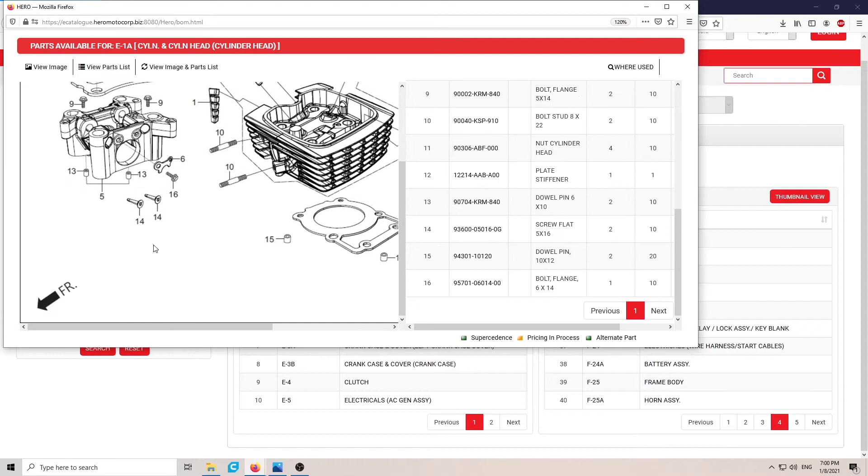In the previous video I showed you a picture, a line drawing, which I picked up from this website. Yeah, there you go, this is what I showed you in the previous video. But today we are going to do something quite exciting to me, not so exciting to you probably.

You have heard me time and time again that I want to convert my BS4 X-Pulse into a BS6 oil-cooled X-Pulse. Because it's necessary - that single cylinder air-cooled engine does not dissipate heat quickly enough if you get stuck in sand or mud, so it's better to do that.

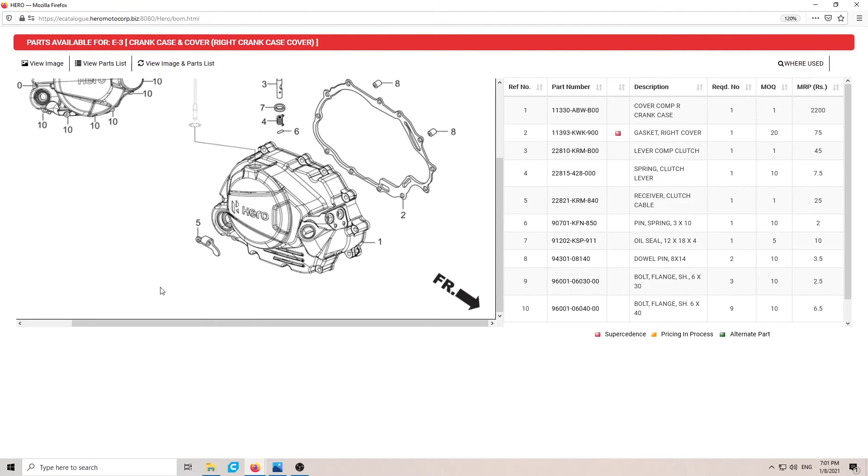So we'll find our part. It's the right crankcase cover, that's what we want changed. Click here, maximize, so we'll see the image first. There you go, now you get the detailed view of just the image, the entire view. You can zoom it up a bit.

This is the old one, you must be familiar if you own a BS4 X-Pulse. And this is the new one - BS6 guys, this is for you, this is your playground. So this is the BS6 right side crankcase cover, and this is the BS4 right side crankcase cover. I told you already, the bolt pattern seems the same, and that's why they didn't even bother differentiating the different bolts that are used here. Everything is the same here.

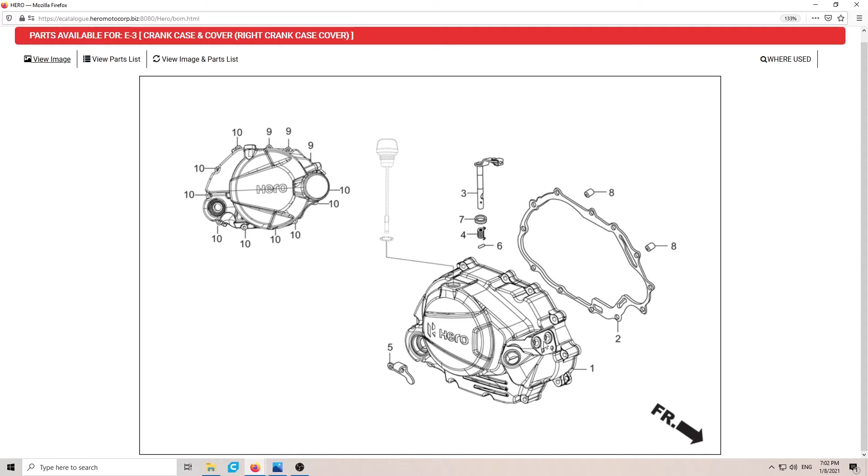And so the BS6 crankcase cover has the important thing that I want: the oil filter - sorry, the oil inlet and outlet for the oil cooler. So now we need the details and the price of the parts. So we'll go to parts view list.

Nah, that's just boring, we'll go here. So we'll select part 1, which is this, and it highlights us. So you get the part number, you get the description of it, and minimum order quantity 1, MRP 2200. So you get the price of the right side crankcase cover.

So if your dealer thinks he's smart and tries to pull off some tricks, you can now fact check him. And another thing that makes me realize another detail that gives it away as a dealer's or commercial website is, you see the minimum order quantity for the gasket cover - you see, 2 gasket cover, 20. You have to order 20 just to get it. So this clearly indicates that this is not for measly consumers but for commercial business owners. So while we are here, we'll check out the price for the crankcase cover, that is 2200.

You need a gasket along the way. You can find it in a local shop. I told you earlier, if you don't find the 200cc X-Pulse gasket, you can use the 160 Hero gasket, it's the same. So we need a gasket, that costs 75, so 2275 total if you want to get these two. That's it, and the rest of the parts should be replaceable.

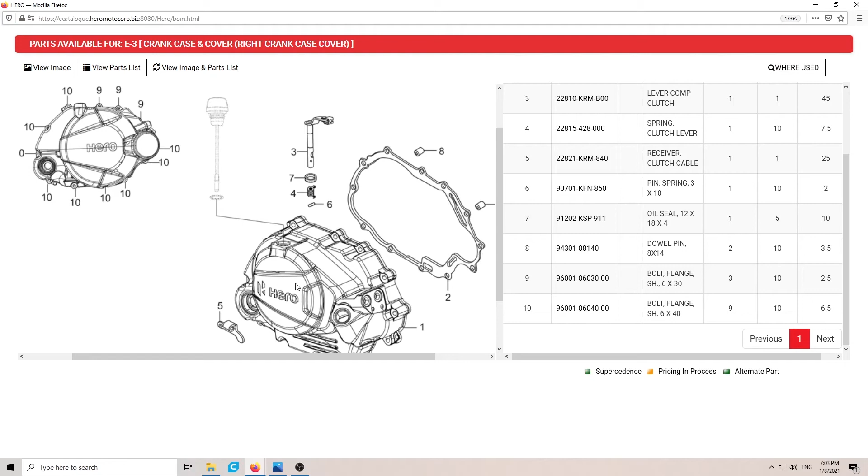That's basically my theory. Now we have the right side crankcase cover. We need the oil cooler. Let's get back to that. Close this, and where is it in our frame? Go to page 1, here it is. In the frame section we have number 3, F-1B oil cooler. So we'll click on that. Yo, the gold. This is the thing that we really want.

Let's view the image. So for the necessary conversion from BS4 to oil cooled BS6, we mean just the oil cooling, we're not converting the catalytic converter and all that. We need the right side crankcase cover for that, and this entire stuff.

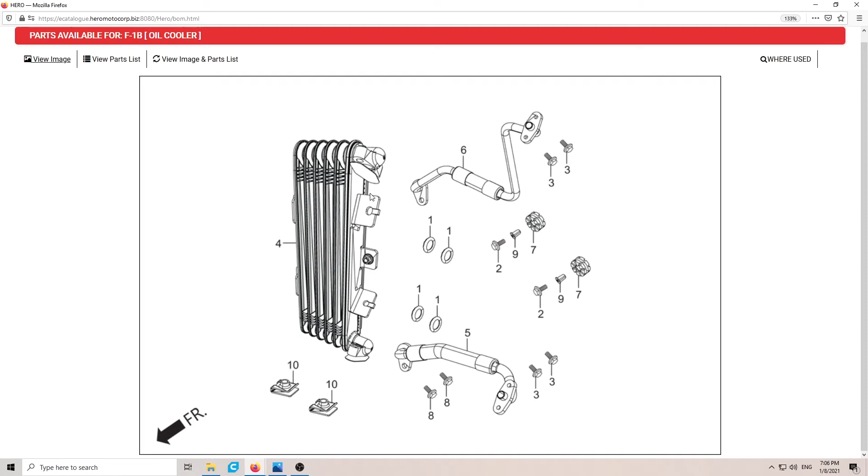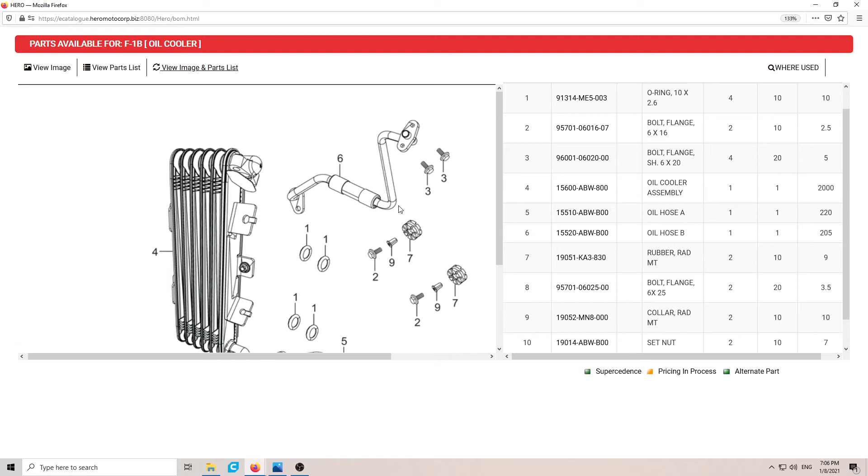I'm pretty happy to find out that you can actually get quite a lot of details here. So let's view the image with the part list, and we have all the details here. How many o-rings you need, how many bolt flange M6 by 16 millimeters, how many bolts you need for the oil cooler assembly, oil hose A, oil hose B. In the image it just shows this shortly, but in actuality I don't think it's just this short - it's made for the convenience of the user, I don't know.

So this is the one. You have rubber pads, another M6 by 25 bolts, collar, rad mount, then you have set nuts. So you have the required quantities that you might need for an entire oil cooler assembly, and then you have the prices of the respective components.

So you multiply that and add the total, and then combine it with the 2275. Then you get the total cost of how much you have to spend just to convert your X-Pulse into an oil cooled one. I think it should be in the ballpark of 5500 something. If you have that much, you can convert your X-Pulse into the oil cooled one.

And I urge all of you - if you're just riding in the city where there's pavement and slight dirt roads, it's not much of an issue for you. But if you are going to take this where it belongs, that is off-road areas, multiple times you will get stuck, like in sand, loose gravel, or probably mud or slush. So I urge everyone who owns a BS4 one, please - 5500 is quite less compared to an entire engine rework if anything bad happens.

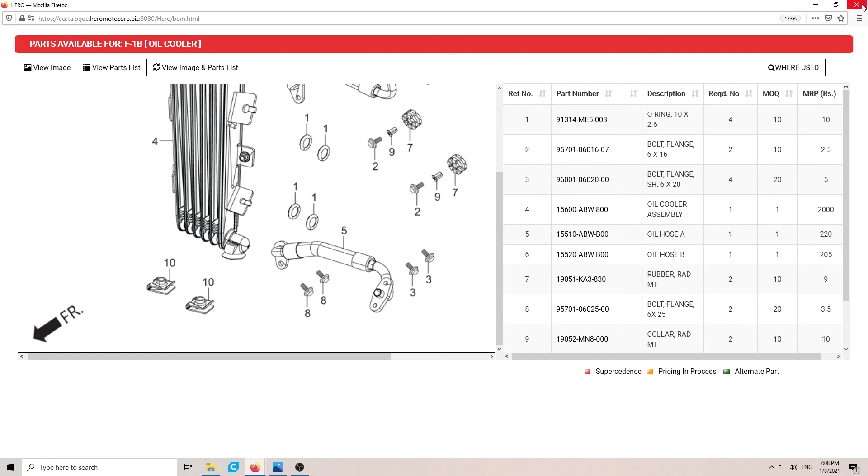So this is a quite useful website for all of us. And downloads - nothing interesting there except the user manual, and we all have the user manual. I hope it contains a workshop manual, which would be quite a gem to find on this website, but I'm working on that. Let's hope we find a workshop manual from an X-Pulse mechanic working at Hero. If someone is kind enough to give it to me, I will give it away to the rest of you.